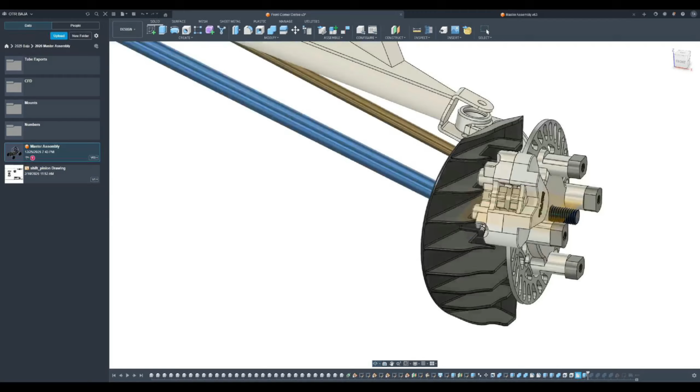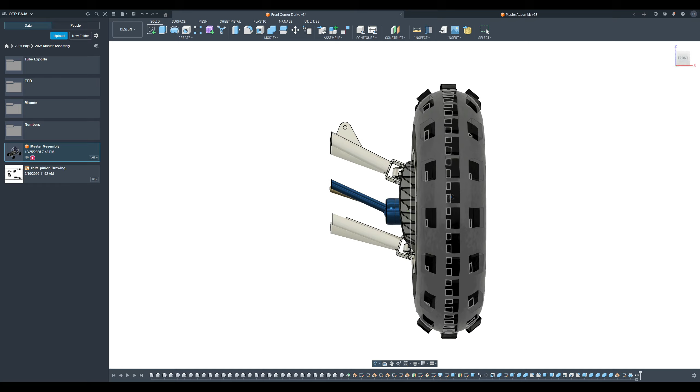All right, so last time we derived from this master assembly the front corner, excluding the shock and a few other more detailed components, a model, which is over here, to begin designing this brake duct with the goal of scooping air in from the front, coming around the wheel, directing it over the brake rotor, and increasing our cooling capacity, both of the brake rotor and the brake caliper in here.

So I'm already done with that. Modeling is a rather long process, so I'm not going to record that at the moment. But I figured I would step through the process here. So obviously, first thing first, right?

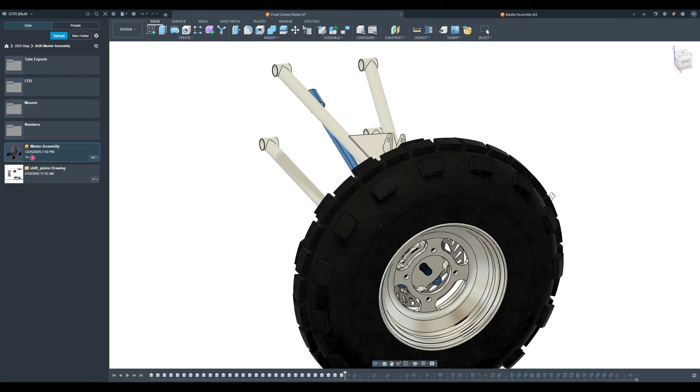I've brought in all of these components. Some of them I've named, some remain unnamed. These are usually the smaller things, like some of these spacers holding the wheel in. But basically, I brought them all in and unlinked them from the master assembly. This is all basically built and on car, so it's not going to change in any way. There's no real reason to keep it fixed as a derive. If there was, I would have kept it, but this just makes it a little bit simpler and faster to update.

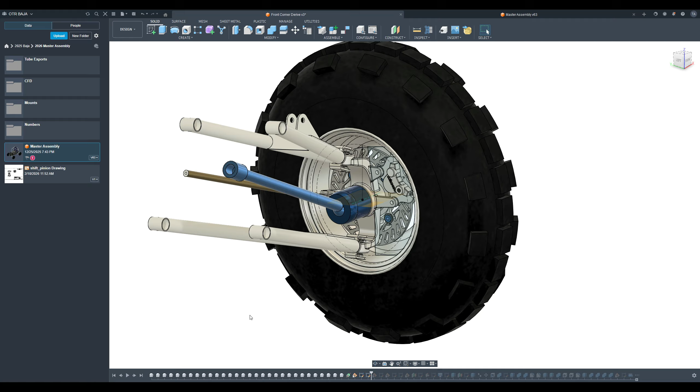So the first thing I did, I made a construction plane and an axis where I could do my first few sketches. And really, my first sketch described the maximum areas, kind of like how I talked about in my last video.

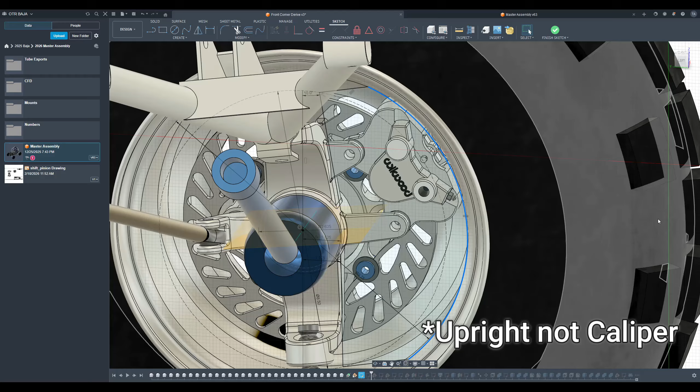We don't want this going too low. We don't want it really going too high. There's pretty minimal gains up here, and it can't come too far out because you don't want to run into the wheel here. And then some clearance roughly around the upright.

So this is the sort of base sketch. Now you could do this slightly more efficiently with regards to the surface modeling I'm about to show, but for the complexity here, this makes it kind of easy. So basically I've got this rough footprint.

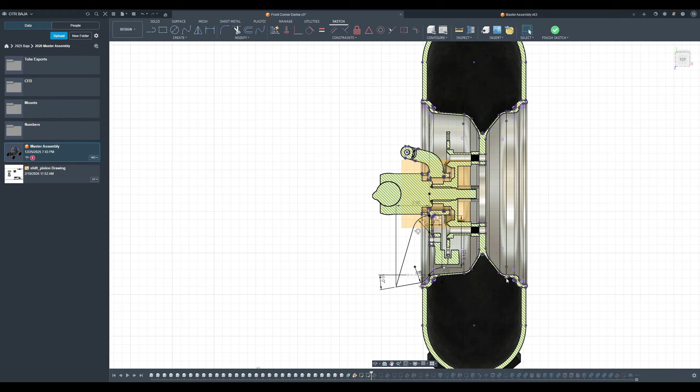The next sketch has quite a bit of excess projected material. I wasn't quite sure how much I was going to need of this, so I just intersected everything, and it looks a bit messy, but most of it is unnecessary, though it doesn't technically affect the drawing.

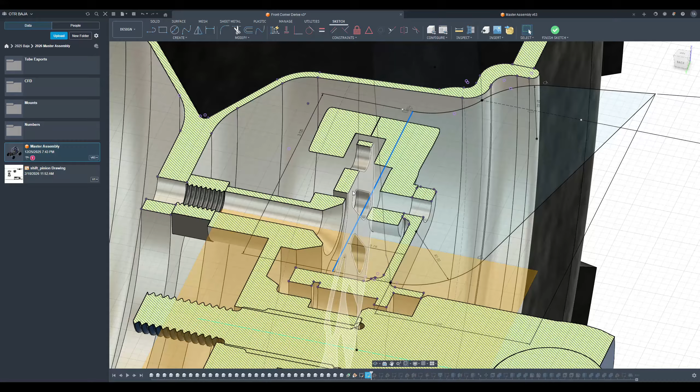So what I've done here is I've basically given a max envelope, so a max depth inwards from my mounting point. Don't want it or need it too close to the rotor, but it needs to come inwards so that anything, basically where the brake duct ends, is either directly against the rotor or the upright is going to push it into the rotor there.

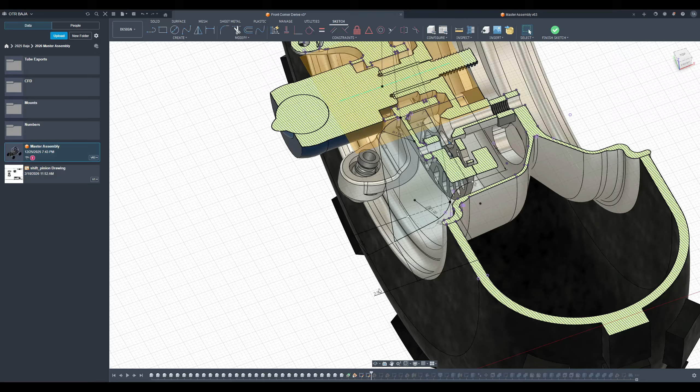So we have an inward set, an outward set here where we're grabbing it 2 inches out. That's our air away from the tire roughly, a little bit less - more like 1.5 inches. This may get bumped out in further iterations, but that's what I was hitting for now because this is pretty low profile and I don't want to go too extreme on my first try.

And then I've just got some nice radiuses, and so this is sort of my center profile here. Once again, this is built off this main base sketch.

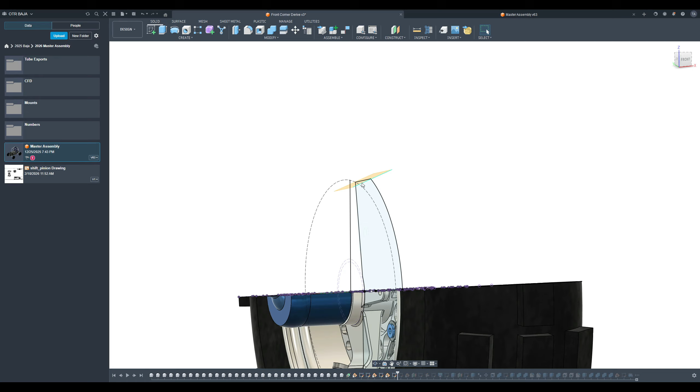Then the next two sketches are pretty simple. I did these 70-degree planes at angles along this top and bottom edge. This is just so that the brake duct has this natural slope inwards as we start.

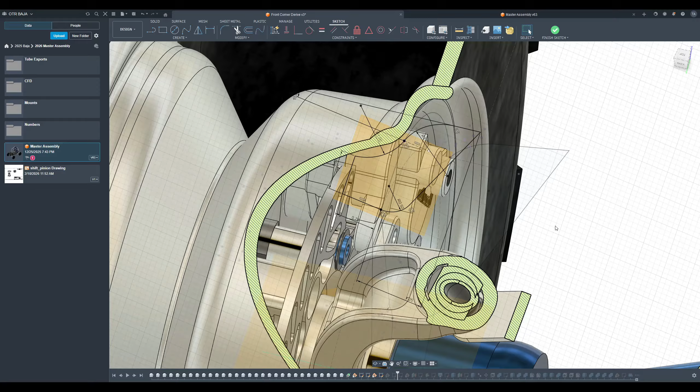And then the sketch up here - pretty simple. Which section is, there we go. Pretty simple. Once again, just trying to make sure we dodge the rim, using relatively similar angles and radiuses as were used down here. I'm not projecting anything up because it doesn't really match up at all. But yeah, once again, pretty similar.

And then the exact same concept for the bottom sketch down here. And that really describes our three main surfaces that we need. And this is already enough to start our loft.

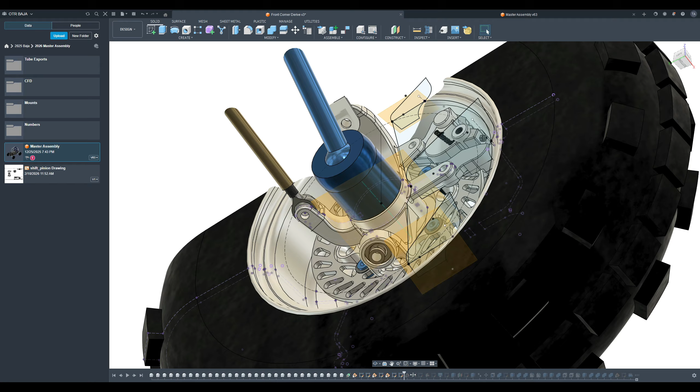So if we go over to the loft - I said surface modeling, I did it first with surfaces and then realized what I needed was actually going to be easier with a solid loft, so that's my bad. But that's these three profiles listed here, right? Now you'll see that I have rails. If I were to go in here and remove these rails, this would be purely what the surfaces get us.

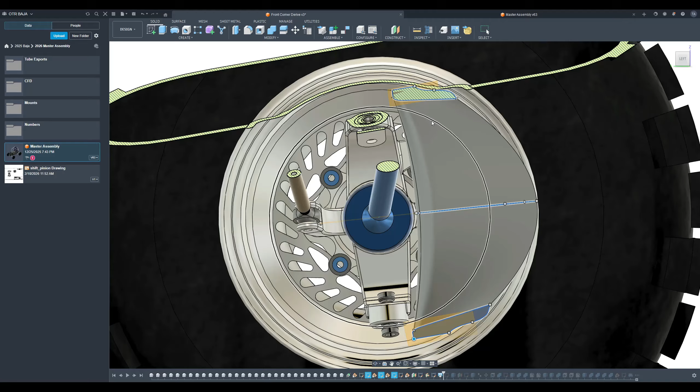So if we remove the rails and hide the sketches, you can see that this just sweeps along as you would imagine. Our side profile, this isn't the most desirable curve, but our front is all right, actually, pretty decent.

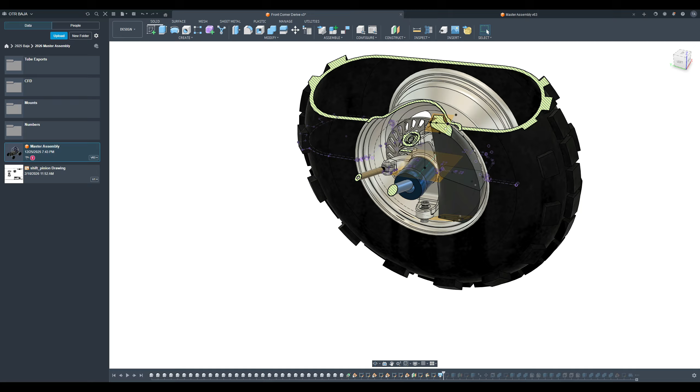So the first thing I did, and this is the easiest way to avoid your profile or rail not intersecting the profile, is when you create your sketch, before doing anything, use the intersect tool on your baseline surface sketches, and click anything that's going to intersect your plane. In this case, really only this line, and it's already been intersected at this point.

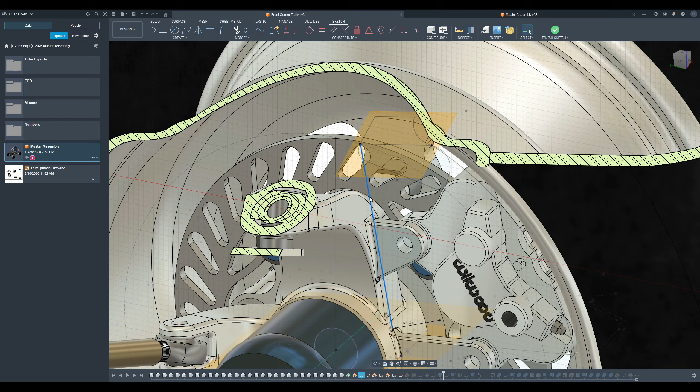But you get this projected point that you then must make all your lines run through. If I were to delete this, you can see this projected point coming off of this portion of the bottom surface, and that's required for your rail to be used effectively. So that's that back rail.

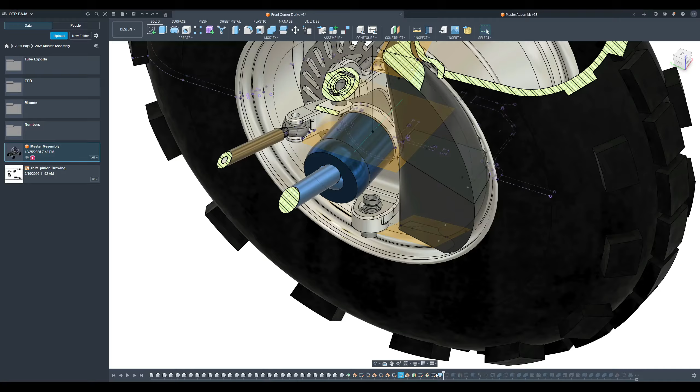If you look at just using this rearmost rail, it works quite good, but you'll notice it leaves this crease beyond where I want, around the corner. It's kind of undesirable, it doesn't look great, and this end piece having a crease in it is just not what I want.

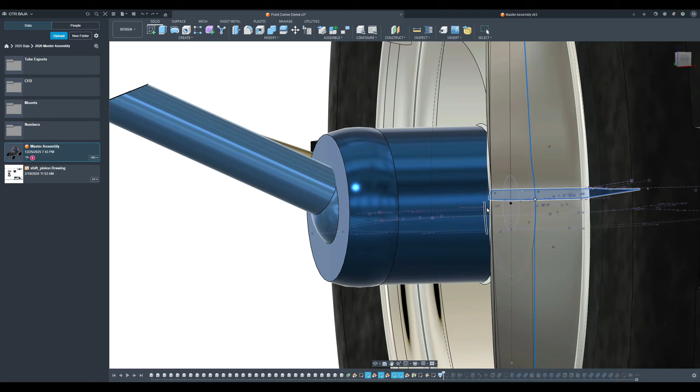So taking that, I then make a second rail. Going back into here, once again I'm just using an offset plane at an angle, making sure it can still intersect every profile, and then I sketch it from the front. I just sketch a nice arc.

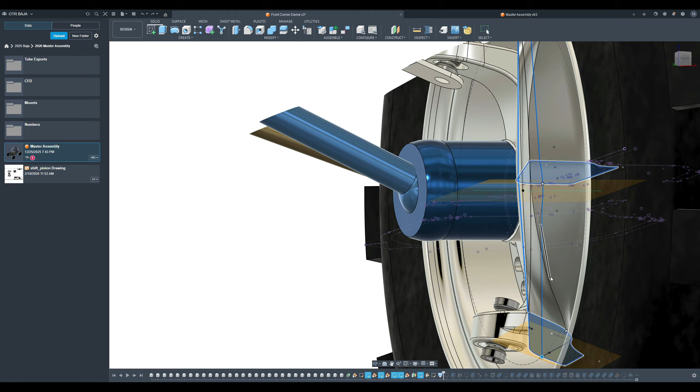Now you can see this front plane is doing pretty well. The shape in this direction is correct, but if you look at it from the side, yeah, it's just kind of ugly. It's not looking good, right?

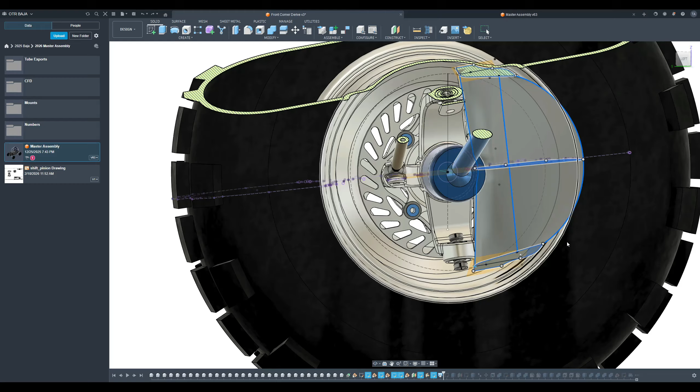Where this profile and this profile end, you sort of have this straight line, and then the third profile pulls it forward, but it's just weird geometry. So this third rail pulls everything forward and defines this forward curve here.

Realistically, if I wanted it to be a little more aesthetic, I could probably look at pulling this curve in, and that may come in a future iteration if I find the middle is building too much of a pressure wall or isn't as efficient. But for now, this shape right here I'm going to consider good enough.

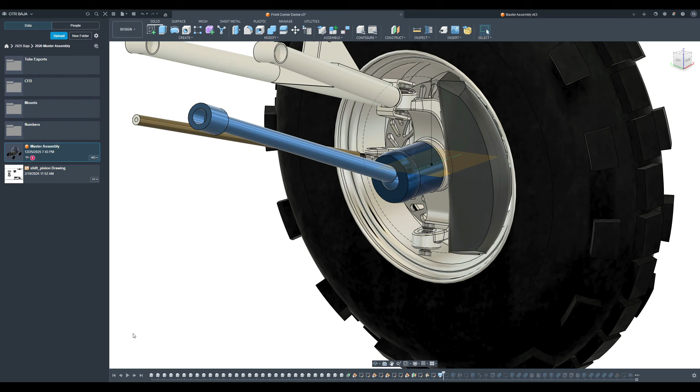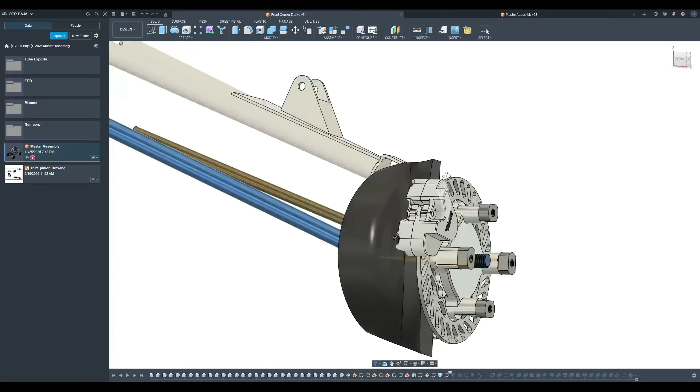So the key moving on from this is we have a base shape. After that, what I did is I found the main geometries that actually intersect my area here, and really primarily that's just this brake caliper. That's the only thing that's in the way.

So I made a primitive that I can subtract from my brake duct just to make sure I don't have any interference in that regard. I put an offset surface out here, and I drew it.

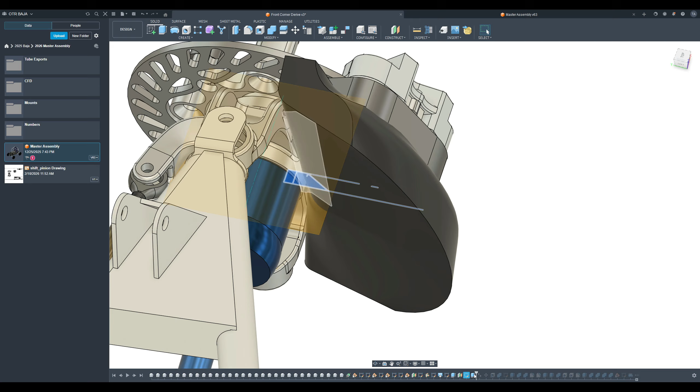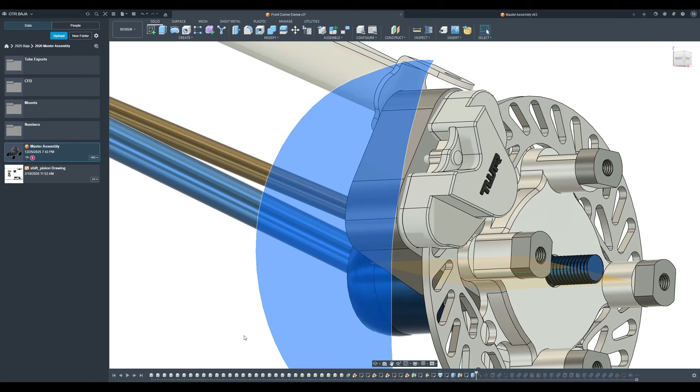I slightly trimmed the back of this brake duct because in my initial iteration, you can see it stuck through the back, and so I had this weird artifact where when I subtracted, there was kind of a hole in the duct, and I was worried air was just going to go out and past the upright instead of inwards. So I removed a little bit of extra from the inside here. I still have clearance for all the mounting points on the inside, but no worries about the air escaping past.

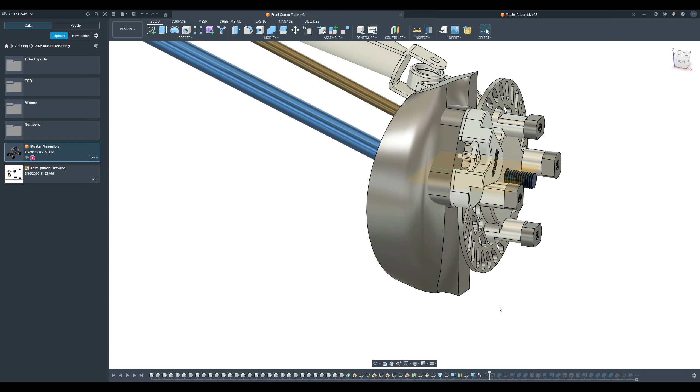The next technique I used, this one's a little bit silly. There is, once again, a better way to do this, but this was the most efficient. What I did was I made a duplicate, so there's actually two of these surfaces here. They're identical, they're copied.

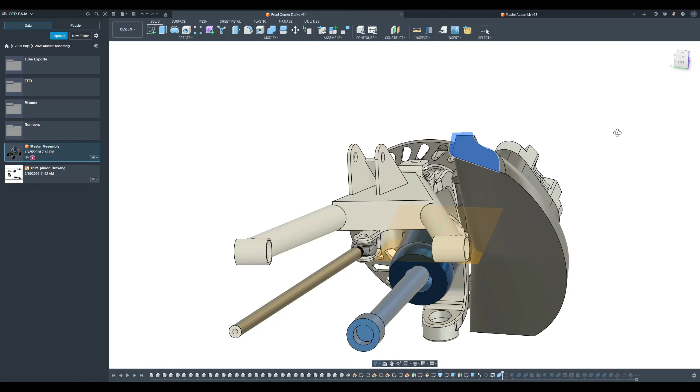It's just two bodies stacked on top of each other. Then I shelled the main body, so now I have this main body and a body that fits directly inside of it down here. I combined them so that now they don't overlap anymore, right? I have an outer body and an inner body right here.

And the reason for this is I want to make fins, but cutting them out all individually, especially against this complex shape, is rather difficult. So instead what I did is I made a sketch.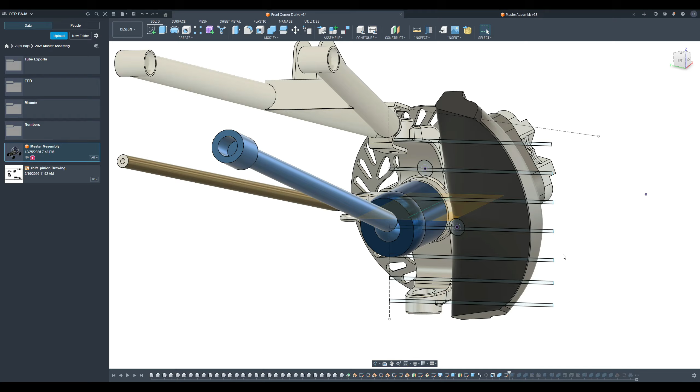I had all my fins along with my mounting point holes, because those were quite important. That ended up being a bit of an afterthought I had to add later, but fortunately it was parametric enough I was able to do so. So I added all those, and then I extruded these through.

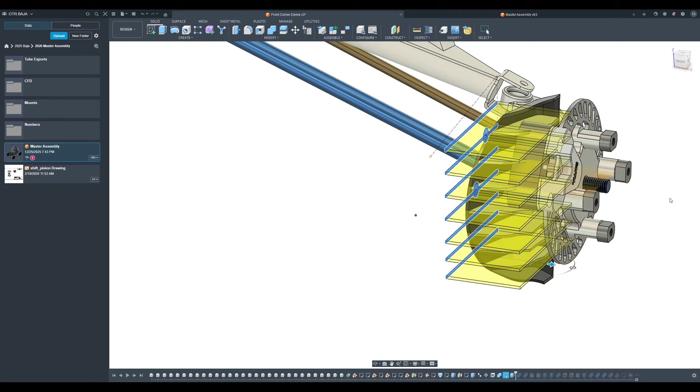This is an intersect feature, so it only keeps the extrusion intersected with the selected bodies. In this case, the only body I have selected is that inner portion that I had earlier. And so that leaves all these nice fins that are perfectly clearanced as I want them to be, and they fit perfectly inside here.

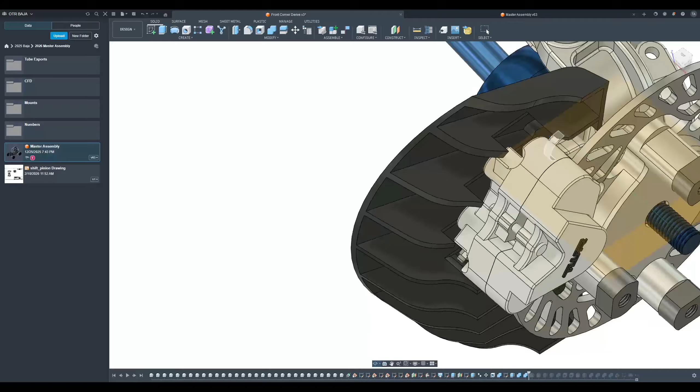So when we step to the next feature, we can see that they join perfectly with this outer case, right? That directs the main majority of the airflow. After that, pretty easy subtraction of this clearance box here, and a couple of fillets to make everything look nice.

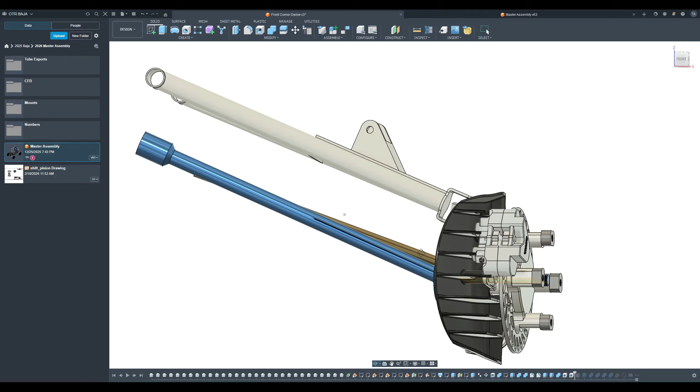And then really that's the majority of this fin taken care of. The rest of the operations here deal with properly inserting all these holes for the bolts. This could be done in less operations, but it doesn't need to be very well parametrically controlled because it's at

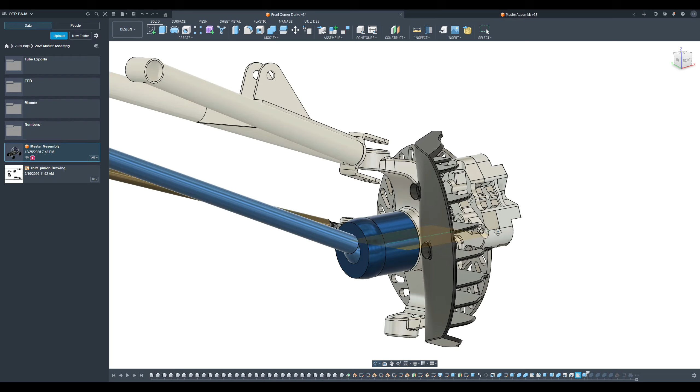the end of the part, and also not very variable. I know the length of bolts we ordered, and it is what it is. A few more features here, and then I did some simplification.

That's what the rest of these combinations are. So instead of having these as separate parts, when I move them to CFD, I don't want too many separate components. It's much easier to just have them as larger components. So I did some combination, I did some naming.

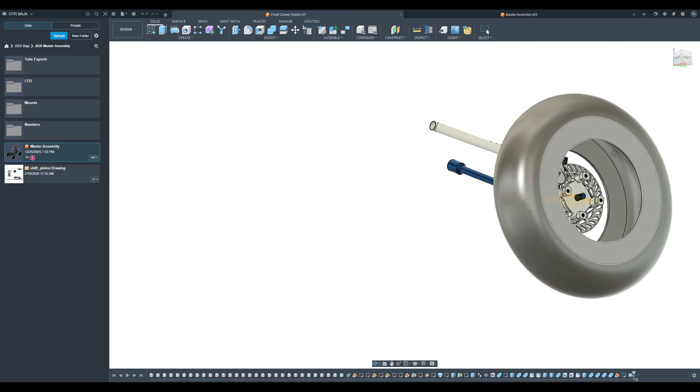And then the last thing here is I created a tire that was primitive. So the old tire has all these knobs on it. I'm not manually rotating this tire, I'm not deforming the mesh, doing anything like an overset mesh in CFD. So these knobs really aren't going to do me much good.

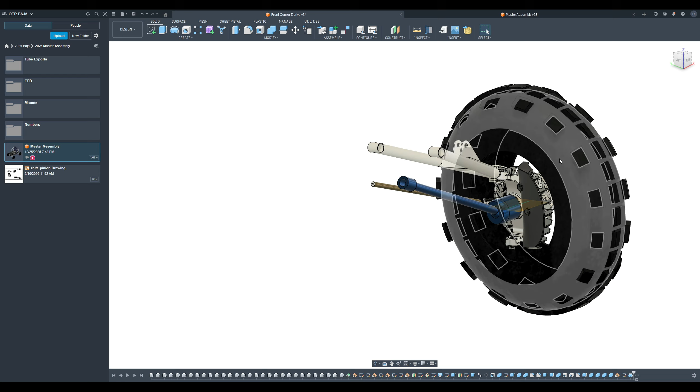The tire's not of that much interest to me, to be honest. I'm mostly interested in how the air comes off the sidewall. So in the interest of being able to rotate the tire surface and deal with that, I just made a primitive revolution of said tire. To put the rim back in, it's the exact same dimensions, it's just removing the

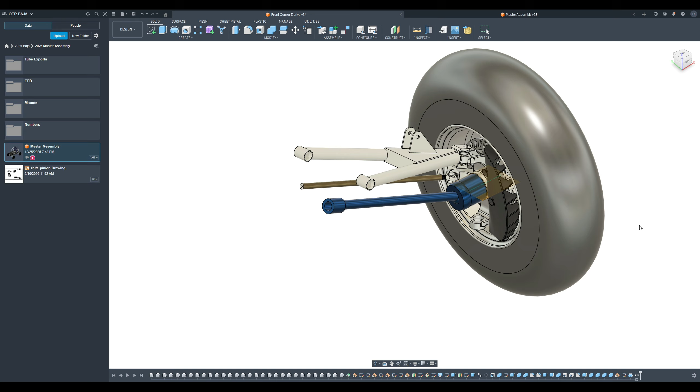knobs and any surface unevenness. So you can see that's how it fits together. And then this last portion here really is just creating a fluid volume right here. I prefer to do this in CAD most of the time rather than CFD.

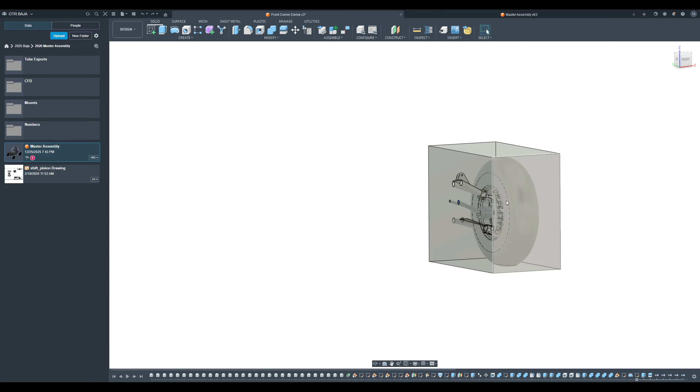You can get some interesting artifacts if you do it in CFD. And I've just found I'm much more comfortable with the CAD software in perfectly defining and keeping all of this parametric, your initial box size and all the rest, in CAD as opposed to doing it in CFD. It can be a bit more flexible if you do it in CFD because you can subtract features and update it, but for my workflow, this just seems to be more reliable for me.

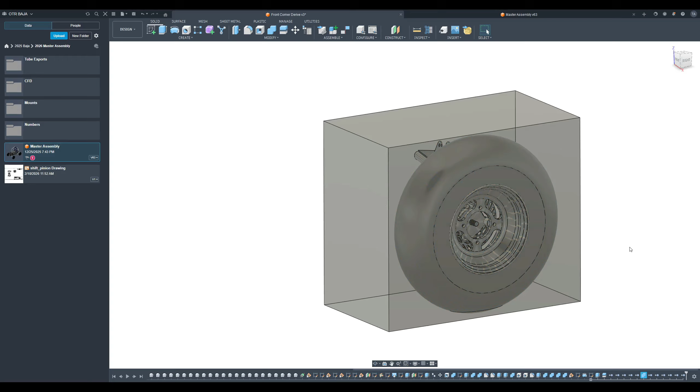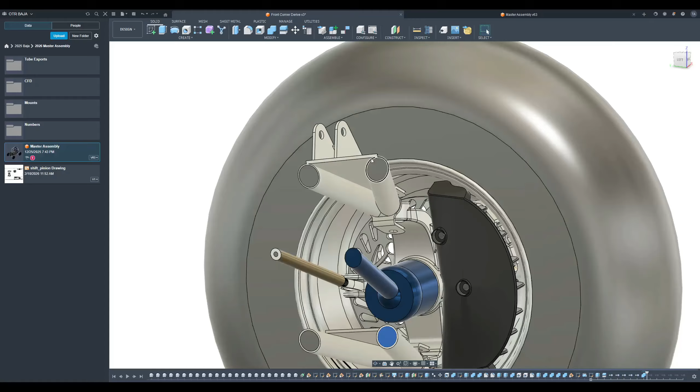So once again, just removing, doing a combined feature here to keep these from anything overlapping. I'm basically subtracting all these, and then this subtracts some of the extra entities, like for example, all the volume inside the control arm tubes. That doesn't actually need to be modeled, so there's no reason for me to keep that in the simulation. That would just either be an extra component that I wouldn't want to mesh, or it would mess with my fluid volume, so it's just easier to ignore it.

So if I head over to my notes here, surface modeling theory, there's a really good overview that Onshape made. I won't pull it up here, but I can link it under the video. This is honestly, and I found this in like the last two days, by far the most comprehensive overview I found.

Maybe I'm blind and I haven't looked in the right places, but I found it and I like it. It's got a lot of good images on there.

The first time I really understood some of these tangency constraints, where you're given G2, how the analysis works, all that kind of stuff. That's really the first time I've understood how all this is actually supposed to work, and where the controls for that are.

So I have a few notes here. For surface modeling, you've got to think in cross sections. Your rails must intersect your profiles or your curves. Tangency issues are probably going to be your most common ones, unless you have intersection problems because you didn't project your lines correctly. But yeah, that's the design considerations.

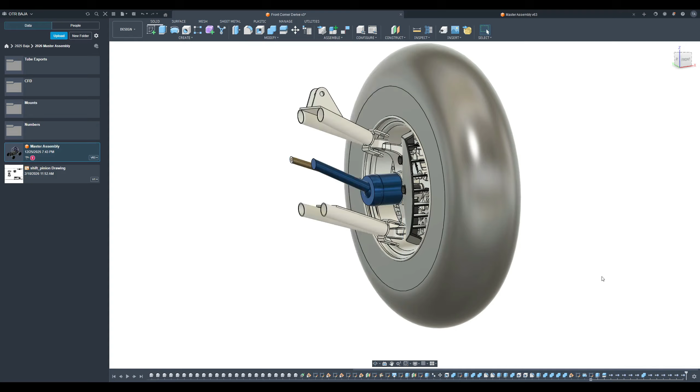So for some of the analysis, we go back to Fusion. You'll notice that these brake ducts actually lie at a 6-degree angle. Part of that is basically what our inclination here is. If I hold this straight, you can see the upright is slightly tilted back, so that puts it at a rough, nice 90-degree angle.

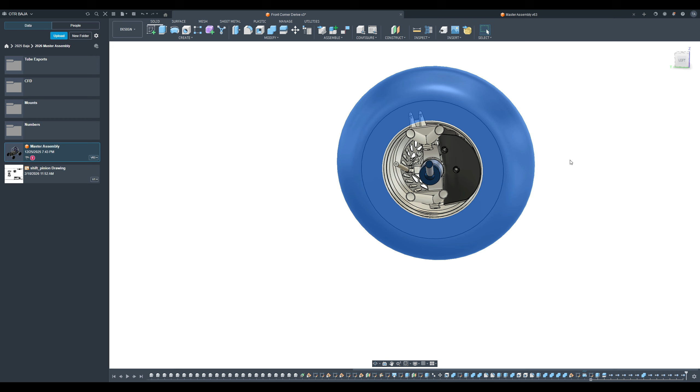The other thing is, even though I did an initial simulation with the tire rotating, I couldn't detect a significant influence of the tire dragging air down into the ducts. Basically, the tire rotates forward, there's some law of the wall, some no-slip condition along the tire, which is going to be dragging air with it and creating some turbulence and some vortices.

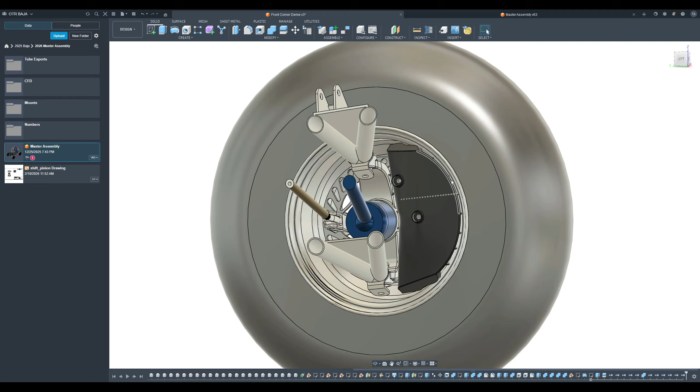Initially, I had these set upwards at about a 20-degree angle. That was way too much. I should have guessed it wasn't going to be that big of an effect, but I think 6 degrees is aesthetically pleasing, and it seems that's probably pretty close. Obviously, subject to change.

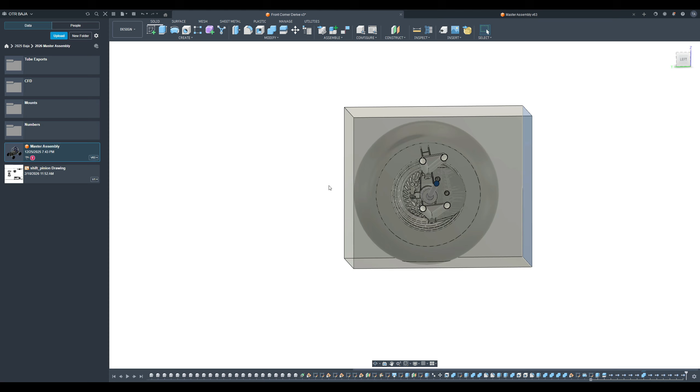The next concern was some of our boundary conditions. So if we bring up the fluid volume, this is going to be the inlet where we bring our fluid in, so the fluid flows across the model. We're going to have an outlet right here where all the air goes out.

Everything else, these sides, I'm just going to set as basically free stream, so no boundaries on them. I mean, it is a boundary of the fluid, but you're not going to be generating turbulence off of it—they're planes and walls with a slip condition on them, so you don't generate a surface layer.

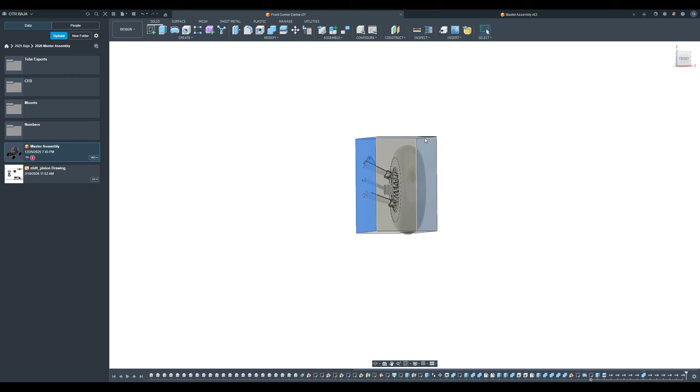And then this is going to be approximating the road. This is going to be moving basically at the speed of the air or the car, because from the reference point of the brake duct, the road is moving. So you want to make sure that your tire and your road are both moving at the speed your car is moving through the air, because otherwise you can build a boundary layer.

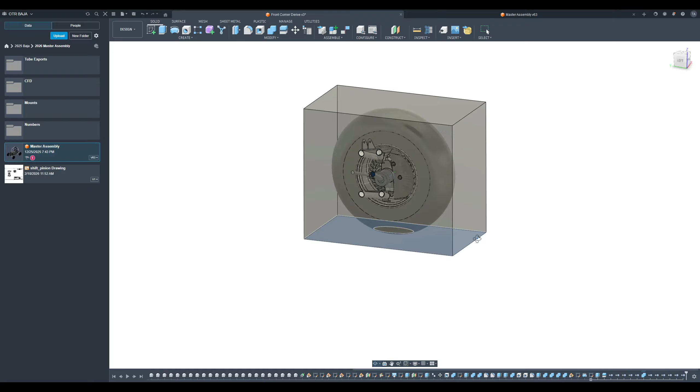It's probably not particularly affecting the brake duct here, but if I was interested in downstream stuff, downstream of the tire, or interactions near the ground—like if I was putting some aero on the Baja car for some reason—I'd very much be interested in that.

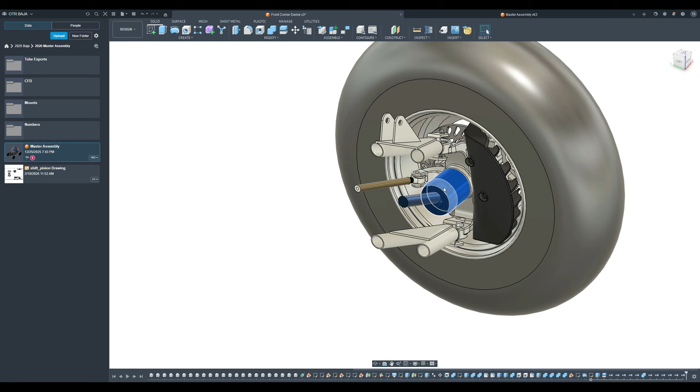Internally, the CV is going to be a rotating condition. The tire I've already mentioned. The entire rim is going to be a rotating condition, and these are just going to be stationary because, once again, overset mesh is a bit beyond what I want to deal with.

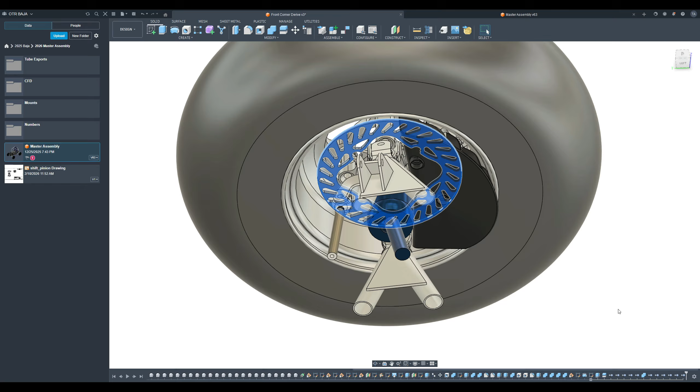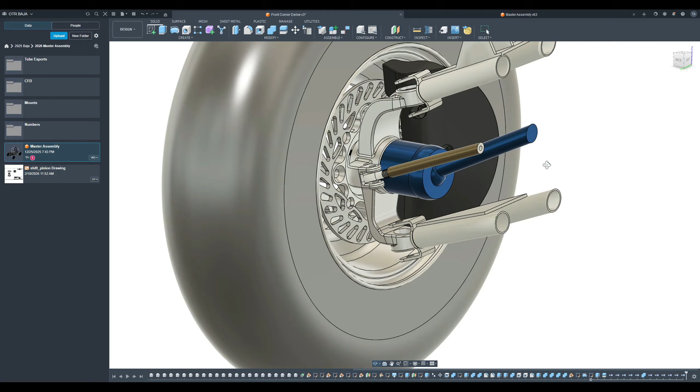And then lastly, the surfaces of the brake rotor are going to have a tangential velocity applied to them, but the physical brake rotor body, the solid body, won't be rotating. I don't think I could get the simulation to resolve the slats anyway, so I'm just going to use the full model here for heat transfer and for maintaining how much heat there actually is in this rotor, so it heats accurately. We have the correct amount of mass, but I'm not going to bother trying to rotate that. Hopefully that's a valid simplification.

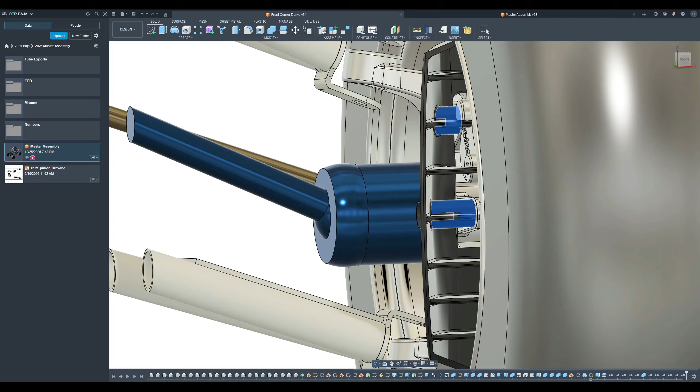Yeah, that's pretty much it. You can see airflow should go nicely through here. May want to trim this bottom one—it may not be very effective with this smaller inlet here, but the rest of these should have pretty clear flow. I'm hoping these mounting points don't obstruct anything significantly, but I believe we should have decent flow in, even behind the caliper here, now that the mount has these pockets in it.

And yeah, I'm hoping this yields some good results when we look at and analyze the results of the CFD next time.